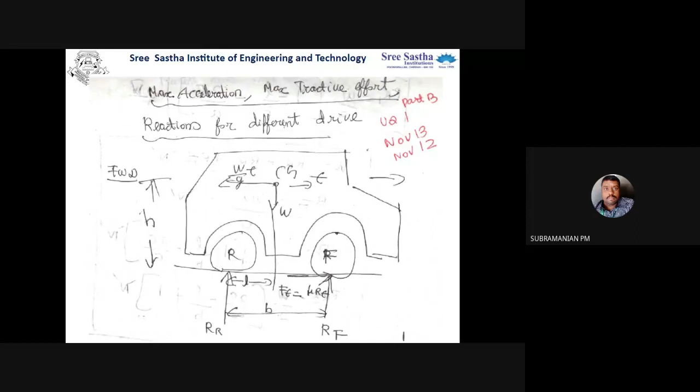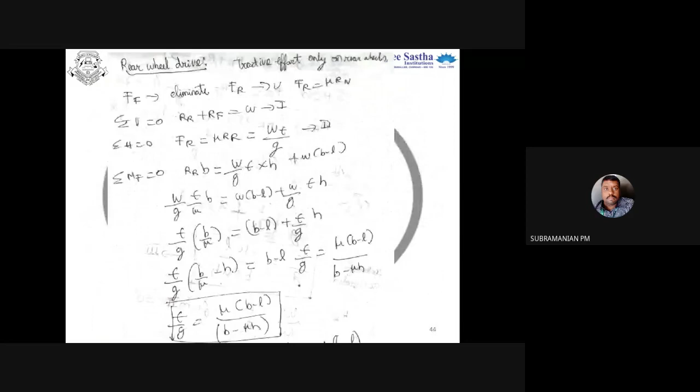Maximum tractive effort and reactions for different drives. So we have seen the expression for acceleration, reaction force at the front and rear, and for all-wheel drive with the third differential and without the third differential, we have seen.

Now we are going to discuss prediction of vehicle performance. So what is vehicle performance? When you are going to design the vehicle, you have to understand what are the requirements for the vehicle, what type of road it is going to be driven on, what should be the engine power, how to design the engine, and what are the geometry parameters - that is the wheelbase, height of the CG from the ground, and other things.

So first of all, the main thing in vehicle performance is, whatever engine you are going to keep, I will be bothering about what is the force available between tire and road. So what is the force available between tire and road? That is the tractive force. This tractive force is the main thing that the engine is going to provide, and this tractive force only is going to propel my vehicle. So for obtaining that tractive force only, we have to choose the engine.

So already we have discussed what is tractive force or tractive effort. It is the force available at contact between tire and road.

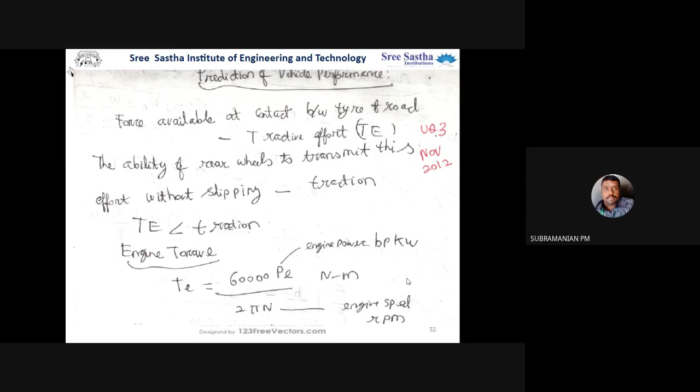So now you are getting a torque, that is from the engine. Now I am going to find what is the torque available at the rear wheels. I am putting TE. The engine torque is the torque available at the crankshaft, output shaft, or flywheel.

But for the road wheel, what torque am I going to add? There is a torque at the rear wheel, since power is delivered to the rear wheel. There is a transmission efficiency I have to put, and you have to put the gear ratio and axle ratio, and see how far it's getting multiplied. The transmission efficiency will reduce the torque, whereas the speed reduction devices, GR stands for gear ratio and AR stands for axle ratio, or final drive ratio.

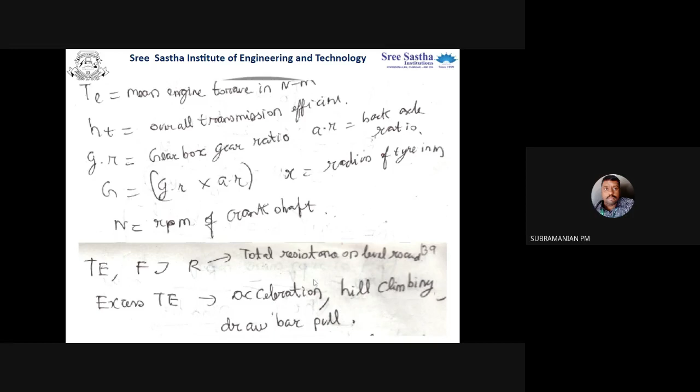This one you might have studied in EDVC, so it is very easy for you. In the last class itself, I told you that is the last sum: what is the relation between engine revolution and vehicle speed.

You put V equal to pi d n by 60, and D you put as 2R. Then always this speed will not be available - the speed will be reduced by gear ratio. So now see, 2 pi r n by G into 60.

Now convert into kilometer per hour - that is in meter. When you want to convert into kilometer, divide by 1000. And when you have to convert into hour, divide by 3600. So in numerator 3600, denominator 1000.

Now I'm going to keep n by v, that is I will bring the v here and take all the terms to the right hand side: G into 60 into 1000 divided by 2 pi r into 3600. So what I'm getting is 2.65 G by R. Now please recap the formula and write it down.

That is, what is the relation between linear speed and rotational speed? Linear speed is V and rotational speed is N. So N by V is equal to 2.65 G by R. Note down this formula.

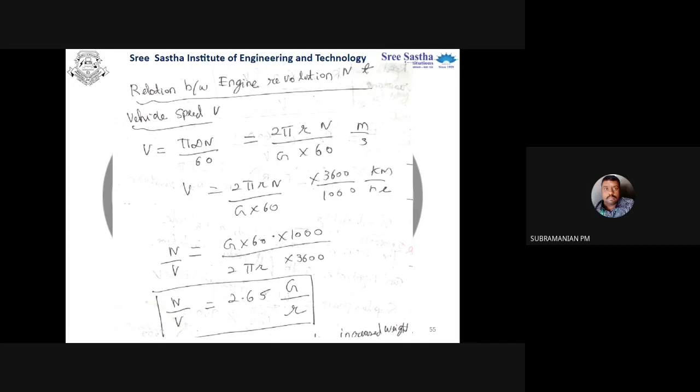Okay, we'll go to the next one - we are going to discuss effective weight. When the vehicle is at rest, we'll be having a weight called static weight. When the vehicle is going to be accelerated or is in motion, we'll be having the weight changed. The weight of the vehicle may be increased due to dynamic forces.

Why? Because the rotating parts are getting accelerated, that will increase the weight W to WE. So in this case, how do we find the surplus or excess power? Always power is equal to force into velocity. Listen carefully: power is equal to force into velocity.

Force for a vehicle is mass into acceleration. Mass is WE, acceleration is F, and the velocity is V. Divided by 3600, we'll be having kilowatt. Please understand this expression.

Here I am putting V will be in kilometer per hour, and other terms will be in kg. In vehicle dynamics at VDDC, even though we are putting the word weight, it will be in kg only. When you are going to do a problem, you'll understand that the surplus or excess power, force into velocity, force is mass into acceleration, that is the equivalent weight into F.

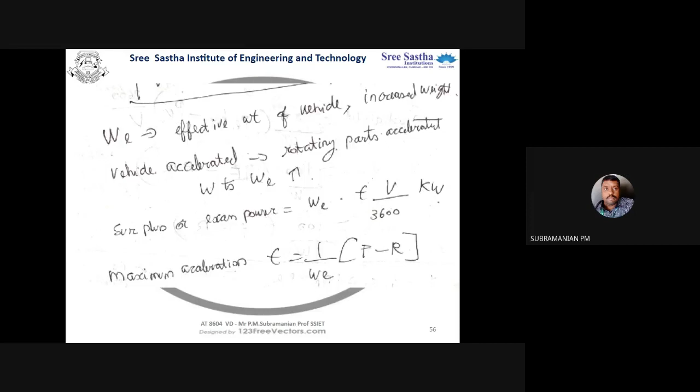Okay, so next all the formulas are related to VDC only, that is you are going to design the engine, that is what is the engine power you are going to fix. So now at first, you know what is the vehicle power, that is for producing the tractive force. What is the vehicle power?

And already you might have studied in VDC that vehicle power, it will be depending upon road resistance, that is R into V by 3600. This all already we have discussed in VDC, that is instead of vehicle power, power is equal to force into velocity, that is R into V divided by 3600, then only I will be getting kilowatt.

So from this expression, I can find what is road resistance. So from the vehicle power, I can cancel this transmission efficiency. Then R is equal to 3600 PV divided by V. So this is the road resistance.

And once you are finding the required power, I can find the tractive force in this formula. So tractive force is nothing but the vehicle power divided by velocity. So we'll be putting PE, that is engine power multiplied by transmission efficiency. That is power is equal to force into velocity. So force equal to power by velocity. Remember this concept, so I need force.

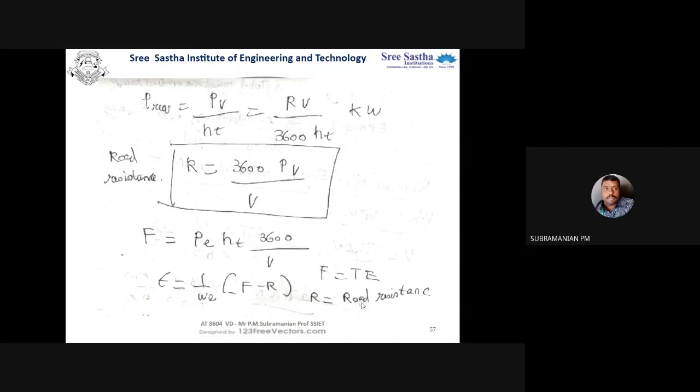So already you might have studied what is gradability. The last sum, that is what is the maximum percentage of grade the vehicle can negotiate. So what is the slope the vehicle can climb? So that is called gradability.

So you can put what surplus power, that is when you want to find what is the surplus power available. Based on that only I can negotiate a grade. So that is equal to W into V by 100 into 3600. So gradability surplus power I can put like this.

Okay, 100 by W, that is engine power multiplied by transmission efficiency minus PV, 3600, that is vehicle power. And what is the engine power available? So this always you have to understand, this will be equal to this for moving at constant speed.

When I will be having excess power, that is when the engine power multiplied by transmission efficiency, that quantity will be more compared to vehicle power. That is the power required to propel, power required to overcome the road resistance, that will be less. So I am having excess power from the engine. That is the concept.

So when PE transmission efficiency multiplied by 3600 by V, I will be getting tractive effort. And when PV is going to get multiplied by 3600 by V, I'll be getting road resistance. So when you are comfortable with the last sum portion, it will be easy. Otherwise please go through the last sum notes, I have included this also. Just go through the formula, that will be sufficient. Please understand the formula and study.

Manikandan, are you able to see a pointer, the red color dot? Yes sir, yeah, thank you for your suggestion.

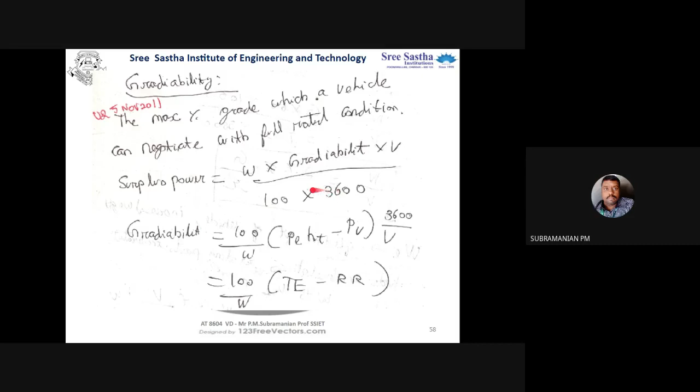Now you can see gradability is equal to 100 by W. That is, you'll be writing tractive effort minus road resistance, same thing what you are going to write. Already we have discussed this. Now the resistance, how F will be equal to R, where R is equal to road resistance.

So when I am going to move in a grade, that is in a slope, I will be having three resistances: one is grade resistance, another is road resistance, and another is aerodynamic resistance. Assume I am moving in a grade at high speed, say 80 kilometer per hour. Then only I will be having aerodynamic resistance, and at normal speed itself we will be having RR, that is rolling resistance. So the total tractive force will be the summation of gradient resistance, RR that is rolling resistance, plus RA that is aerodynamic resistance.

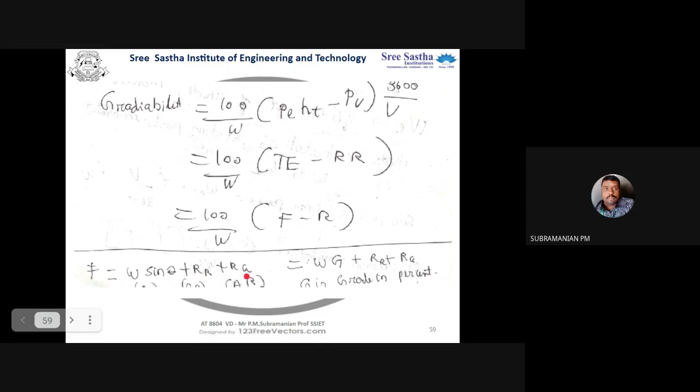Then drawbar pull, already you know, I can use the excess power not for acceleration or grade, I will be using it for pulling the extra load. So for pulling the extra load, how much force is available? That is called maximum drawbar pull, that is I will be using tractive effort minus road resistance, F minus R. So that will be drawbar pull.

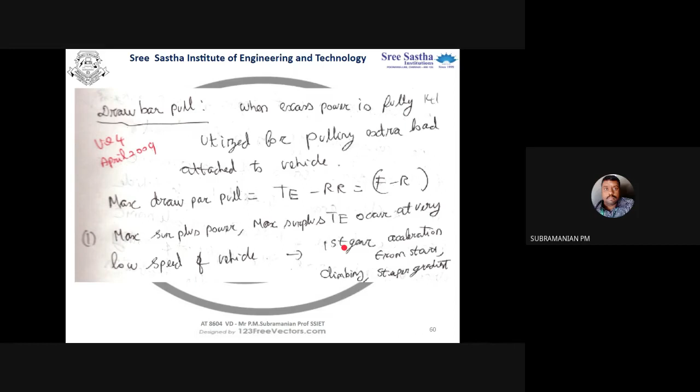You have to understand that we will be having maximum surplus power available when you are driving at low gear. That is when you are taking the vehicle, initially you will be putting in first gear, so at that time more torque will be there. That is more power in the sense of torque, not speed. So at low speed I will be having more tractive effort, so I will be driving the vehicle at first gear, so I will be having excess power that can be used for drawbar pulling, hill climbing, or acceleration.

So when maximum speed is reached, whatever power I am getting and whatever power I am required, when both become equal, I will reach the maximum speed. Further I can't accelerate. That is once you start the vehicle in first gear, more resistance is there, once you overcome it, the excess tractive effort is used for accelerating, and you accelerate to a particular speed. At that speed, the power coming from the engine will be equal to the power required, that is the vehicle power. So beyond that, you can't increase the speed, and you reach maximum speed. The available power is equal to the required power, that is my tractive force will be equal to road resistance. So at this time, your vehicle will be running at constant speed.

And desired road speed is there. Desired road speed means when you are going to have part throttle operation, as opposed to wide open throttle. Part throttle operation means you are not giving full acceleration, the throttle is opened partially. So what is the problem with the second feature? We will be consuming more fuel, whatever power comes from the engine will be consumed.

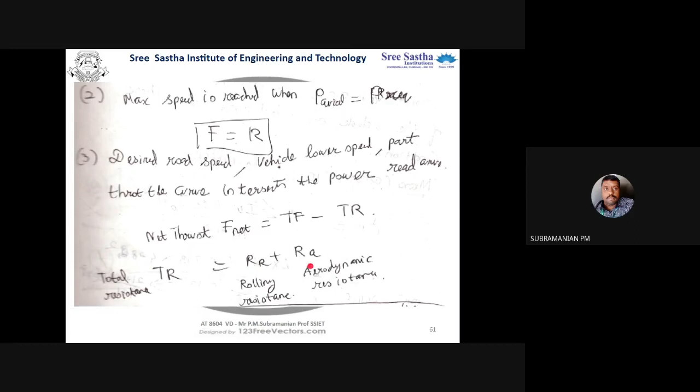So now the available tractive effort will be tractive force minus total resistance. Total resistance will be rolling resistance and aerodynamic resistance, assuming you are not driving on a gradient.

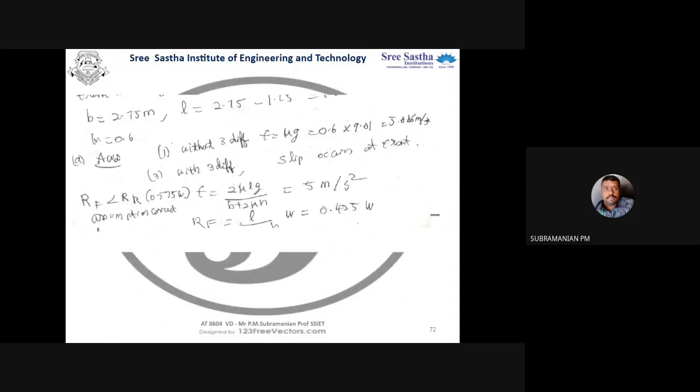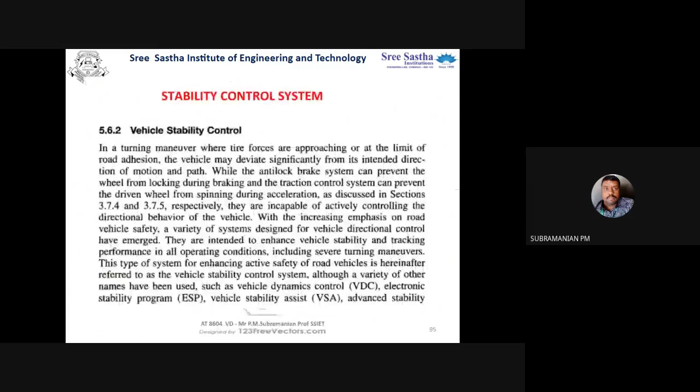Now I am going to explain one problem, it is the most important problem. With that problem, then after that, this and all will be completing in the next class. This and all is easy only, you might have already studied this.

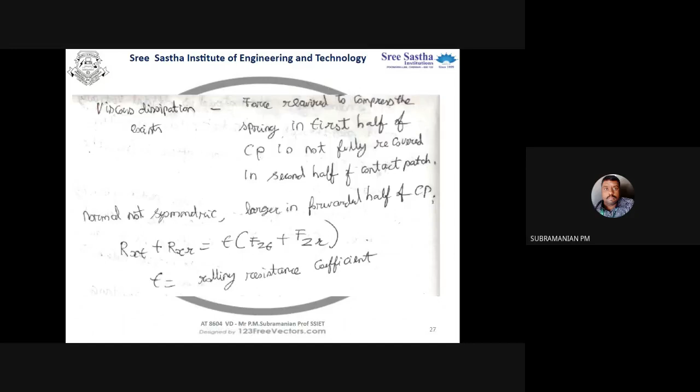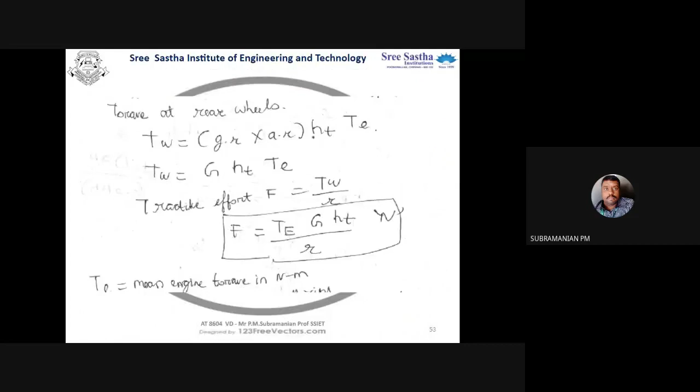I will complete this problem and another one also.

See, you are having a vehicle. The vehicle weight is about 21.24 kilonewton, and in that vehicle we are having four wheels. The four wheels have rolling radius, that is R. The vehicle weight is 21.24 kilonewton, and this problem is taken from...

That is, you are having Heisler's Automotive Mechanics. I have taken this problem from that. So in vehicle dynamics, whatever content I am going to give is a combination of articles referred from different books. I am having tailor-made notes, referring some portion from N.K. Giri, some portion from Wong, some portion from Gillespie, and some portion from Heisler. So it is a combination, like a guide, by referring different books.

So these are tailor-made notes. From my perspective, I think this will be sufficient. Most of my students have used these notes and got somewhat good marks, so I advise you to refer these notes as a minimum requirement, and you can enhance your knowledge by referring other standard books also. Another book is Rajesh Rajamani, unit 2, tires. So that only I have compiled all the notes in a PPT and shared as a video so everyone will be benefited.

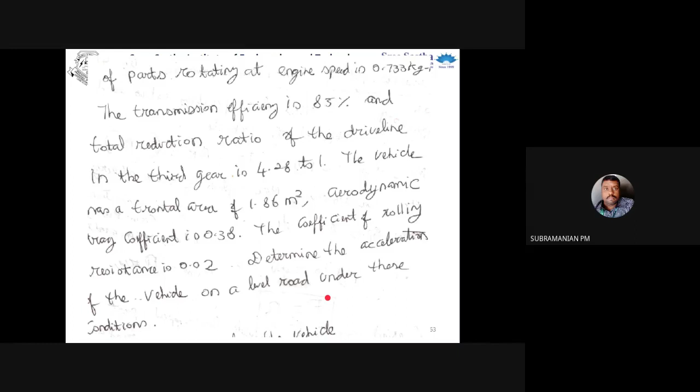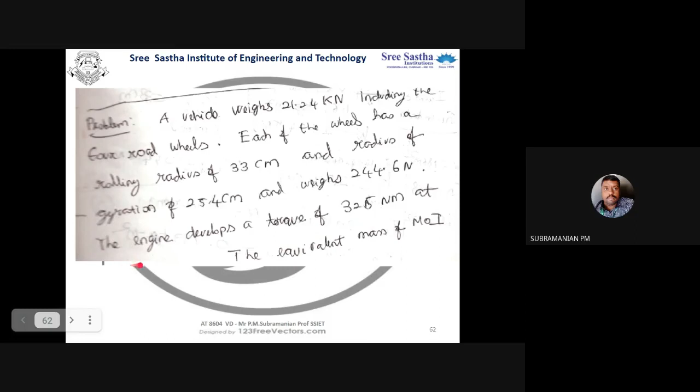N is 3,500 rpm. So read the problem. The engine develops a torque of 325 Newton meter at... this is not visible, okay, I didn't copy it properly. So you please note down, engine speed is given as 3,500 rpm.

After that you find out the total resistance. So you find out Ra and Rr. See the first one, rolling resistance is 0.02. You multiply this by weight of the vehicle, and the aerodynamic resistance involves drag coefficient and vehicle speed.

For that only we are finding what vehicle speed. Convert into meter per second. That is rho A V square - that is the aerodynamic coefficient, frontal area into speed.

And the density of the air - that is the formula: rho A V square multiplied by CD. So 1.225 into CD, how much? 0.38 into A into V square.

That is V, you are finding out here. For finding out the aerodynamic resistance only, we are using this formula with vehicle speed. How to find vehicle speed from engine speed - first you divide it by G and multiply by R, and slip also we are considering.

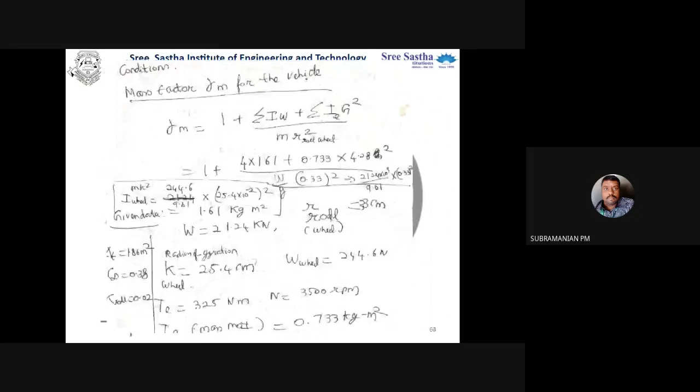So you copy this formula. First of all, no need to write this first - you write this one, mass factor. Write this and substitute, and later you can work out for finding the mass factor.

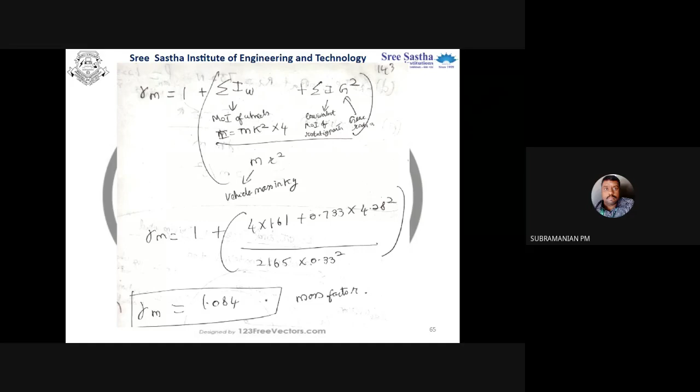You copy the next slide, tractive effort and vehicle speed.

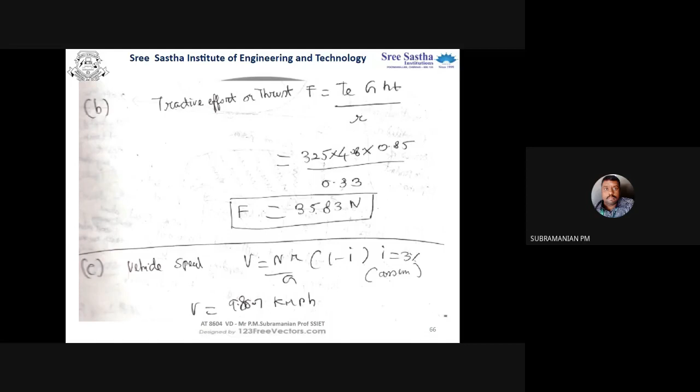And finally, write down this formula for acceleration, and please work it out. The density of the air will not be given - it is 1.225 kilogram per meter cube.